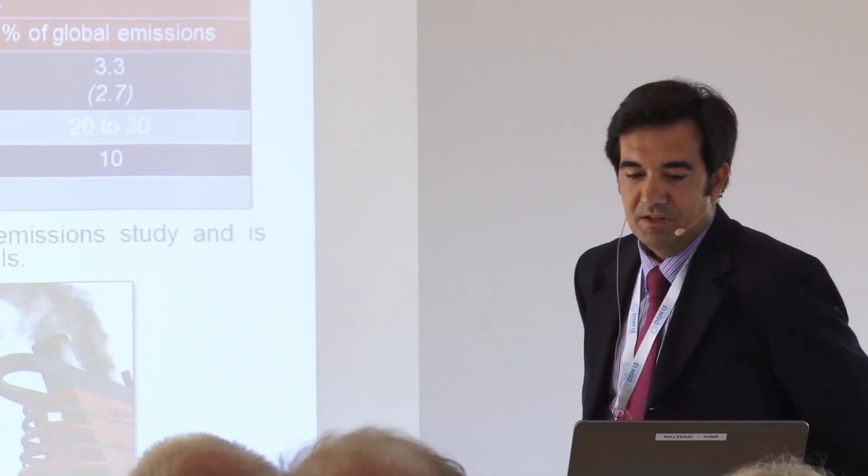So we know that shipping is very traditional, but is the most efficient way of transportation. But even so, transportation by ship is polluting the atmosphere, and we know that there are tons of NOx and SOx and particulates.

IMO has been involved in following this matter of emissions to the air since the beginning, since 1997. And then in 2008, the rules for air pollution came into effect in MARPOL. They are continuously monitoring the situation, and this year they have even decided to make a third report, because this is the result of the second report they made about emissions from shipping in 2007.

This year in the Environmental Committee in March, they decided to make another report, which will be the third, and they are also following very closely the evolution of the sulfur content in the fuels.

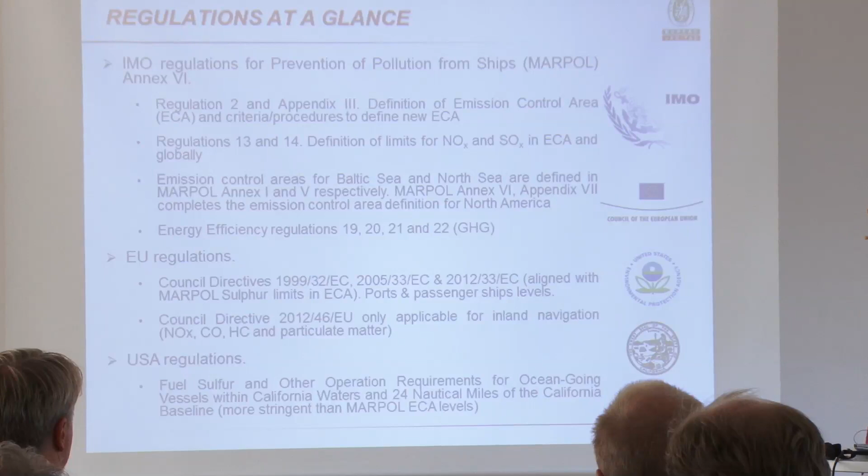The regulations now for air emissions are as follows. You can see in this slide, as you know, the MARPOL regulations are the main regulations for NOx, SOx, sulfur and nitrogen pollution substances to the air. And inside MARPOL Annex 6, there are all regulations related to these pollution products and to the emission control areas. I will also show you another slide with details of all the emission control areas included in MARPOL.

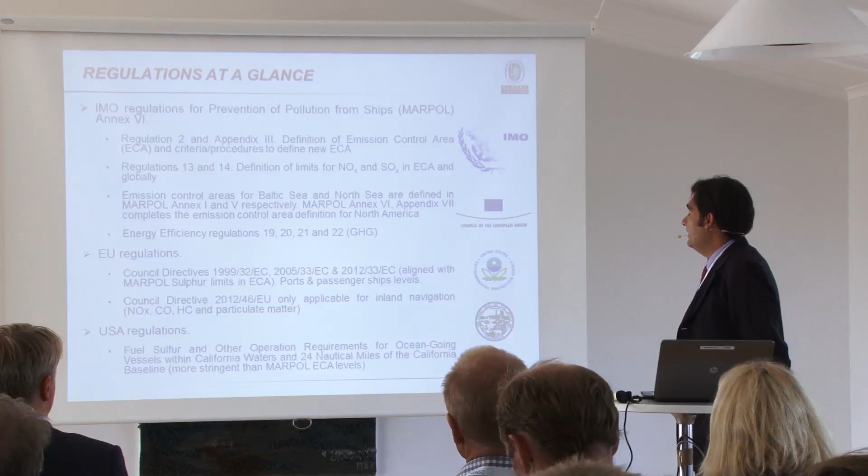And last but not least, there are also regulations in the same Annex 6 related to energy efficiency, in close connection with CO2 and greenhouse gases. On the other side, we have the European Union rules, which are very close to the International Maritime Organization MARPOL rules, in line with the last regulation from last year, but more stringent in some aspects, for ports and passenger ships. I will show you later the levels required for that.

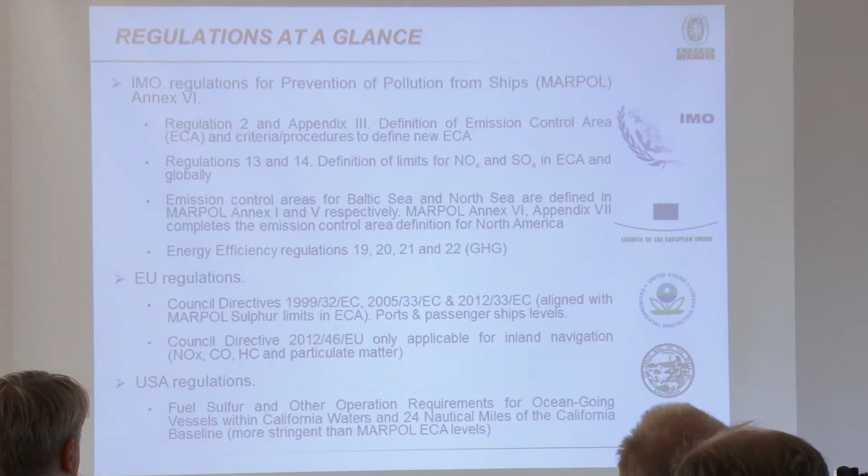There are no regulations for international or coastal shipping as far as NOx, but there are some regulations for inland navigation. And last, USA regulation, specifically in California. We have regulations to comply with within 24 miles of the coastal area of the state of California in the United States.

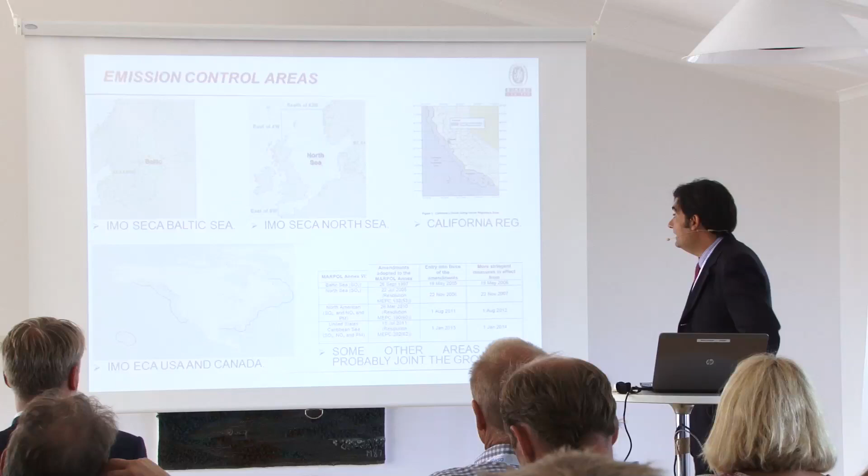These are the areas now defined as emission control areas. For the time being, we have the Baltic, as you know, the Baltic SECA, only for sulfur emissions. We have the North Sea, also SECA, sulfur emissions. We have the IMO emission control area in the United States and Canada, 200 miles from the shore, for NOx, SOx, and particulate matter. So this is NOx and SOx, and those ones are only for sulfur. The California regulations, 24 miles from the coast, are also related only to sulfur.

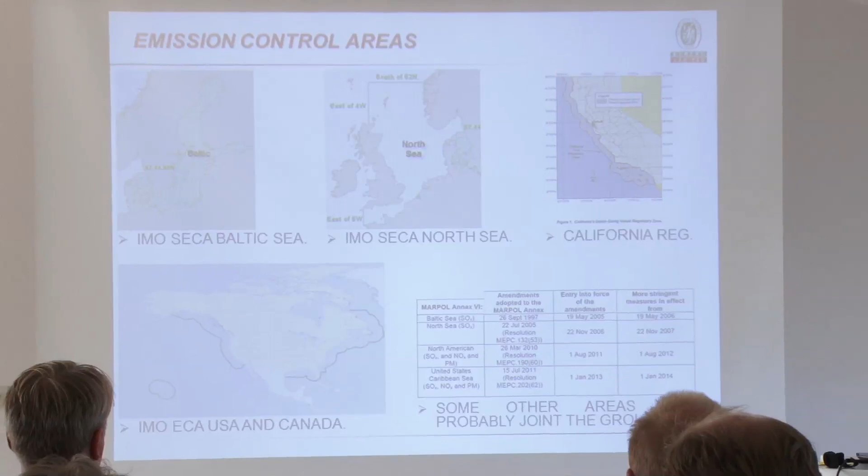In these charts, you can see the different dates of definition of the area and the entry into force of the stringent levels. Three areas have already entered into force. The last one last year in August, North America and Canada, and the next one, on 1st January next year, will be the Caribbean US islands.

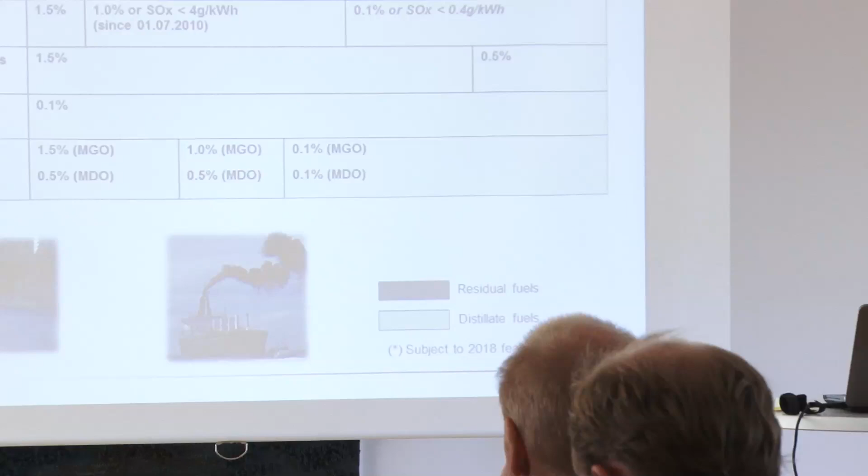So what is now required according to IMO, California and European Community rules is in this chart. We have the dates for compliance with a certain limit of sulfur content in the fuels used in ships. The global IMO limit will become very, very stringent in 2020, 0.5. This is subject to a feasibility study in 2018. So depending on the status of the fuels available for shipping, the IMO will decide whether this figure will be mandatory or not.

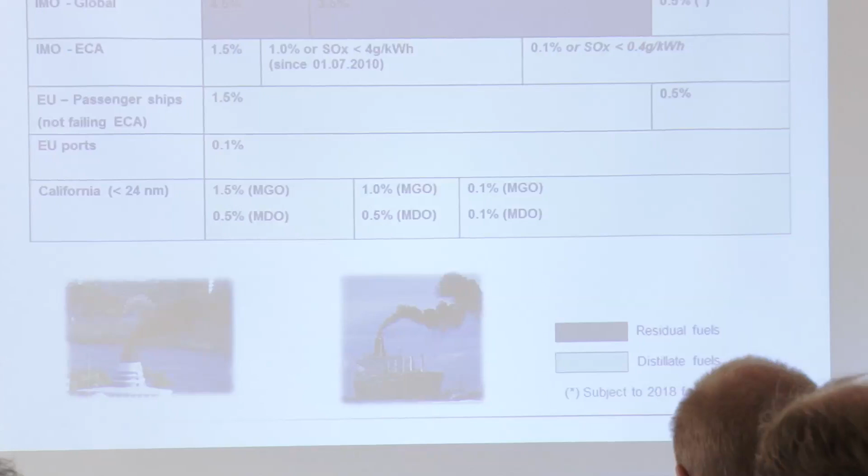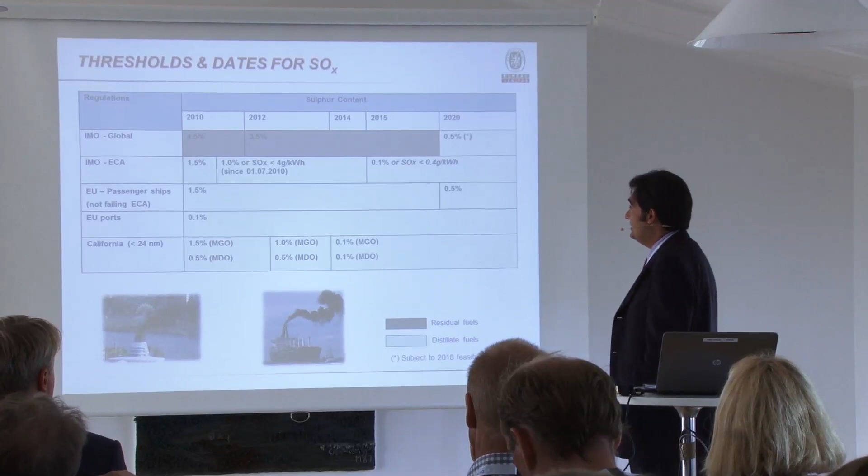The IMO limit in the emission control areas is becoming very, very stringent in 2015, so in less than 1.5 years from now, 0.1. Specifically, European regulations for passenger ships not sailing in emission control areas, but sailing very often between ports in the European Union, is 1.5. In European Union ports, ships have to comply with 0.1, which will be the level in the emission control areas. And in California, these levels are entering into force on 1st January 2014.

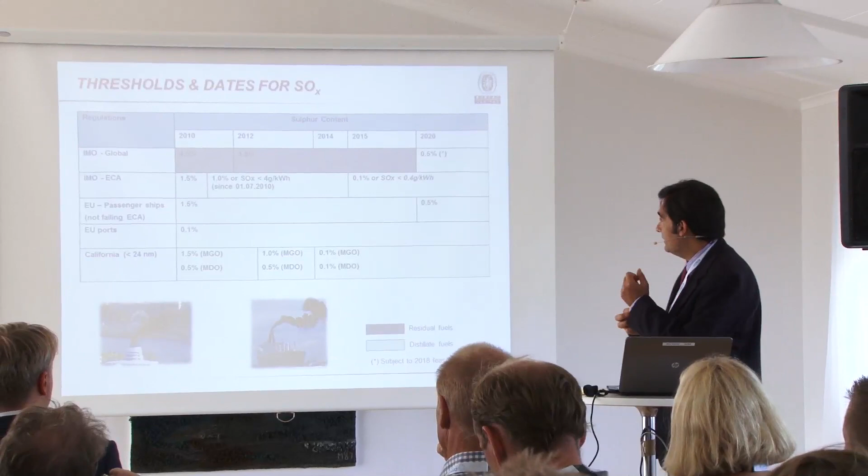So what is the problem here? Well, the problem is very simple. We now have fuels with sulfur contents around 2.4, let's say. This is enough for IMO, but it's not enough for ECA areas, and will not be enough for those areas. We need to find fuels with less sulfur content, so more expensive. We have to use gas oil, diesel oil, distillate, with expensive cost.

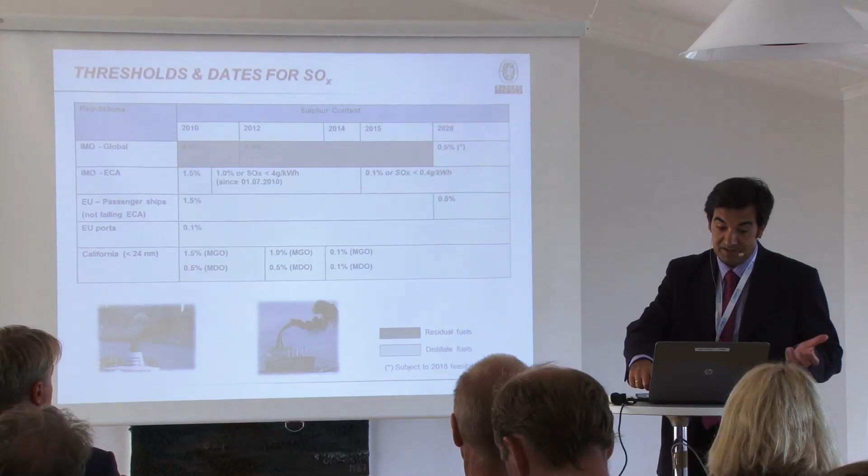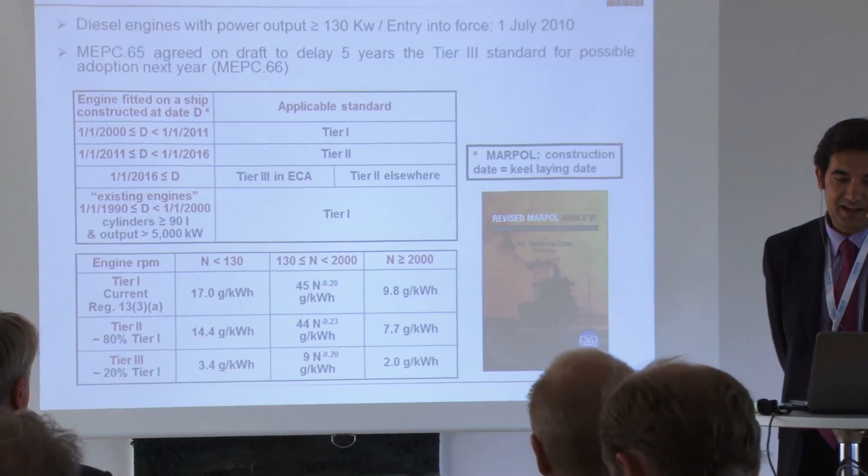MARPOL rules for NOx, you know, there are some different levels of compliance. Now we are in tier 2. Tier 3 level is expected, but subject to the approval of one draft in the next MEPC next year. This level, tier 3, could probably be delayed 5 years. So it means that the tier 3 levels probably will be mandatory, but in 2021, not in 2016. But we will see. This is subject to final adoption agreement in the next environmental committee inside the IMO.

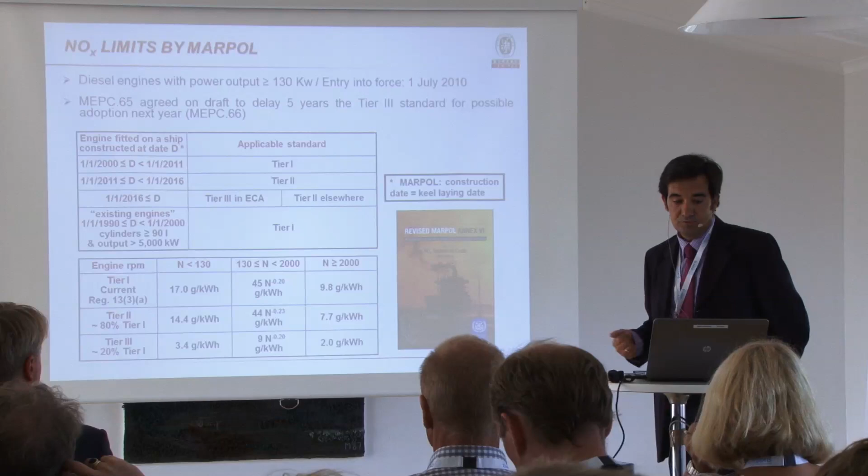But here, the problem with tier 3 is as simple as that: tier 3 requires a reduction of almost around 80% of the NOx levels compared with tier 1. Tier 2 is simple, to achieve this 20% reduction in NOx, but to achieve the 80% reduction is very hard, very difficult for the engine manufacturers.

The last regulations in MARPOL are related to greenhouse gases, to CO2 mainly. In these regulations, regulation 19, 20, 21, on one hand new vessels have to comply with the energy efficiency design index. And on the other hand, all vessels, new and existing ships, have to put in place on board the ship energy efficiency management plan. This is also a good try from IMO to reduce the CO2. And we'll see that with alternative fuels, we can also have reductions in greenhouse gases.

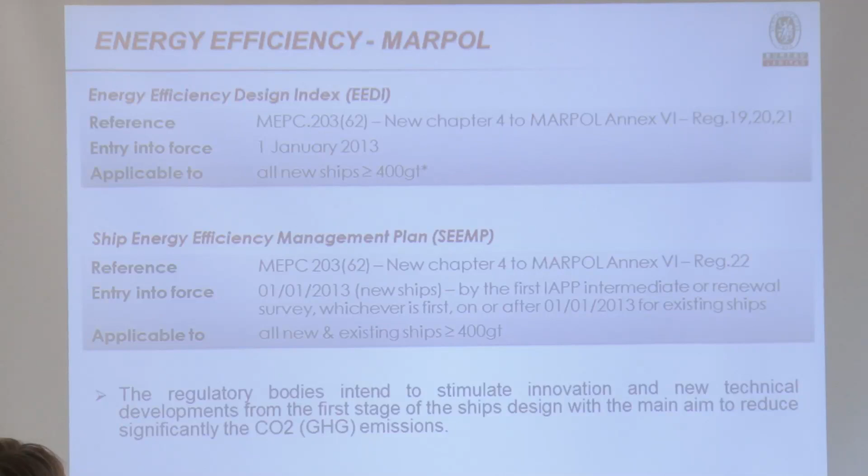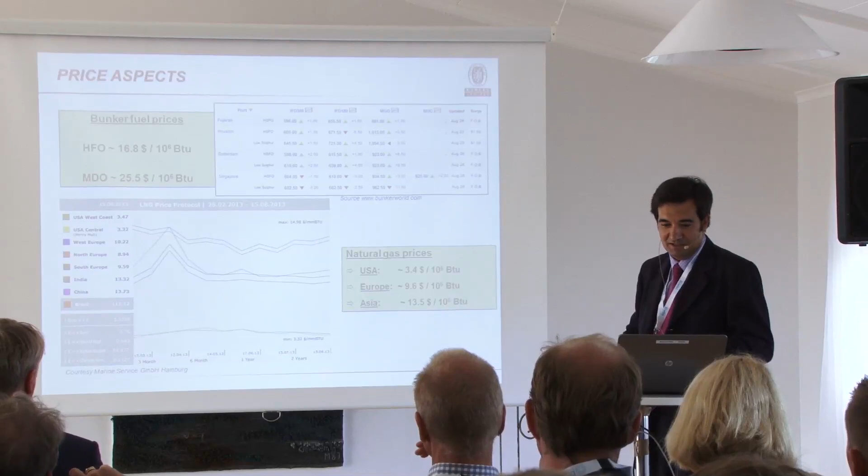We have seen all these technical aspects, but now we are entering the commercial aspect of LNG compared with bunker fuel prices nowadays. I have made the slide all in the same units, dollars per million BTU, British thermal unit, because natural gas prices are not the same, always depending on the energy content of the LNG. The LNG is not the same if you buy it in Norway or in Qatar or in Libya. But at the end of the day, what is really clear is that these are the levels in the spot market of LNG all over the world.

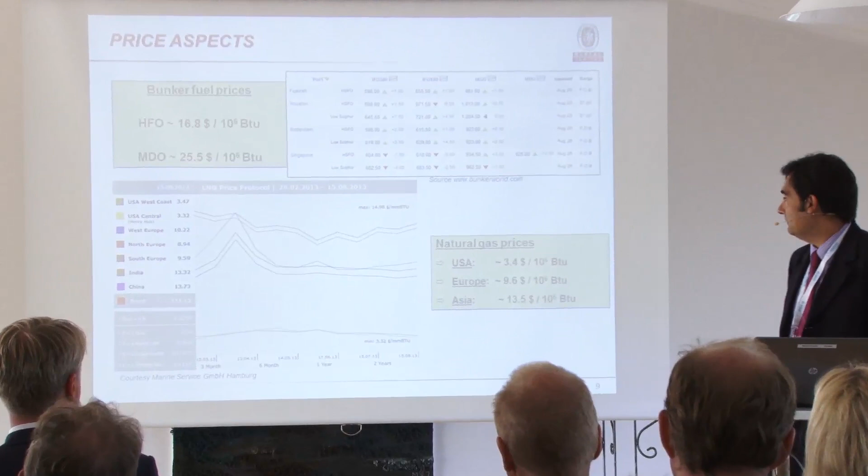In the USA it's very cheap because they are developing shale gas, and these techniques are very cheap for the extraction of the gas. But in Europe the price is also very convenient. In Asia it is a little bit more expensive, but compared with marine diesel oil specifically, it is very cheap.

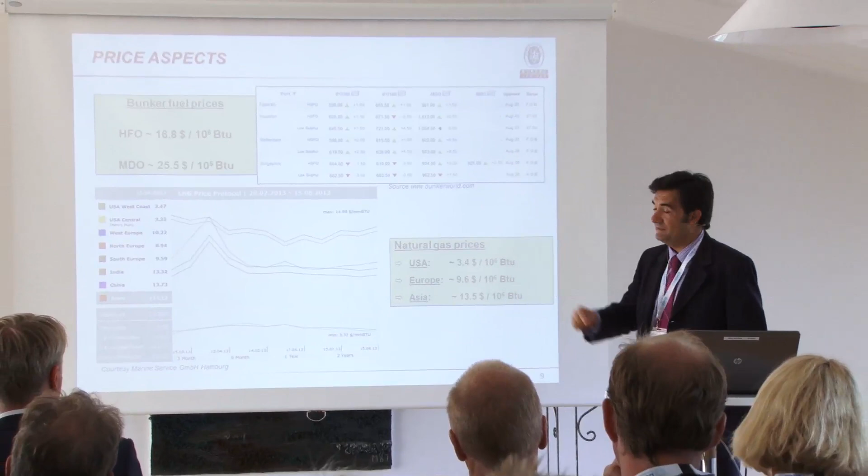On top of the spot price, you have to take into consideration also the bunkering cost and the logistic cost. These are not bunkering prices, while the heavy fuel oil and marine diesel oil prices are bunkering prices. But on top of that, you can put, let's say, $6, $7 more. You never know. But you are always cheaper than marine diesel oil. You will be, in any case, much cheaper than marine diesel oil, even in Asia. So LNG could be one solution. We'll see if there are others.

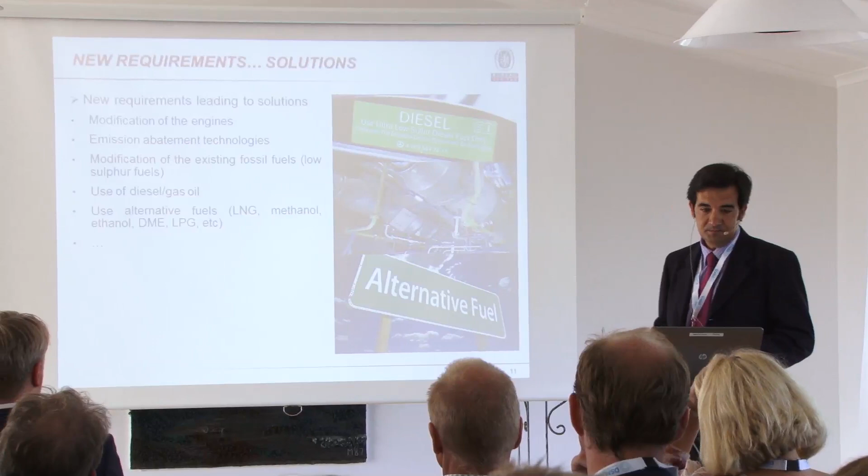How to comply with regulations? You can comply with different techniques, different solutions, different alternatives. You can modify the engines. You can have abatement technologies to reduce the content of NOx or SOx after the combustion in the engine. You can use different fuels, like LNG or methanol or any other low flash point liquids.

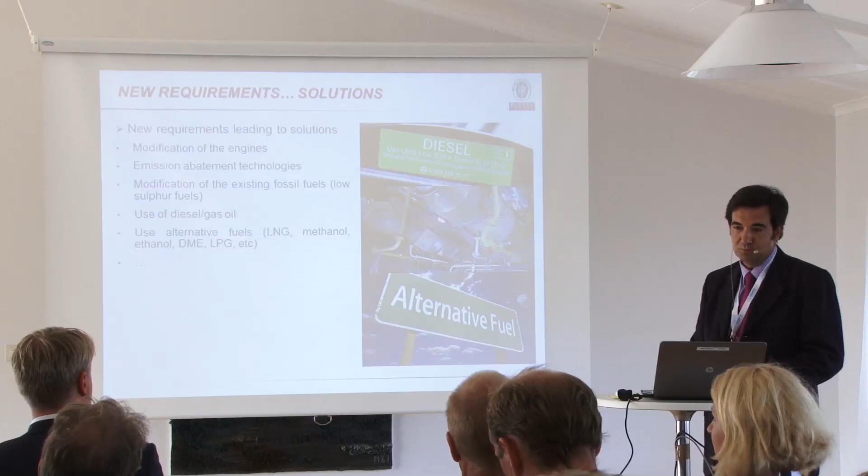But when we are talking about solutions, I think it's always easier to think of a solution upstream than downstream. I mean, if you have to solve a problem, modifying the content of sulfur, SOx, NOx in the gas emissions is more difficult than directly using a fuel with a lower content of sulfur and lower content of NOx. And so we have alternatives, and we'll go through all of them.

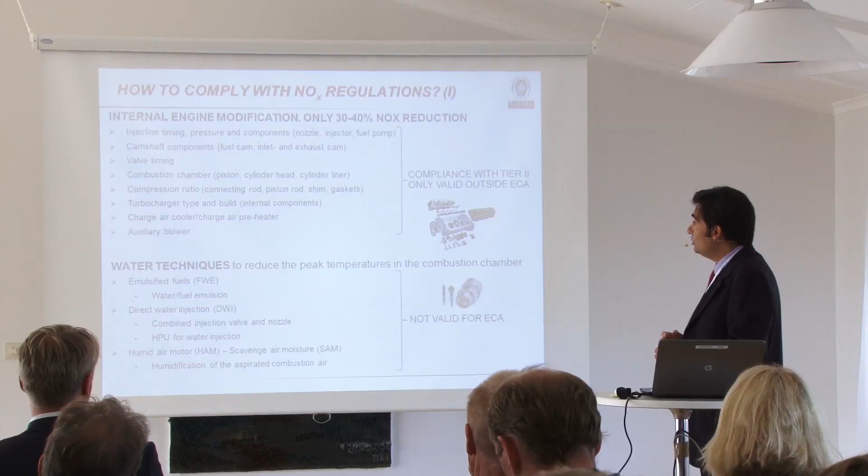For NOx, the best solution in the beginning, when we had tier 2, is just to modify the engines, and we have a lot of solutions. To modify the engines means that the engine manufacturers try to reduce the combustion temperature in the chamber, and with the reduction of the temperature, you reduce the NOx in the emission gas to the atmosphere. But this is not good for tier 3, only for tier 2. And these solutions are also not good for efficiency of the engine and for consumption. Normally the efficiency is worse than the original engine with tier 1.

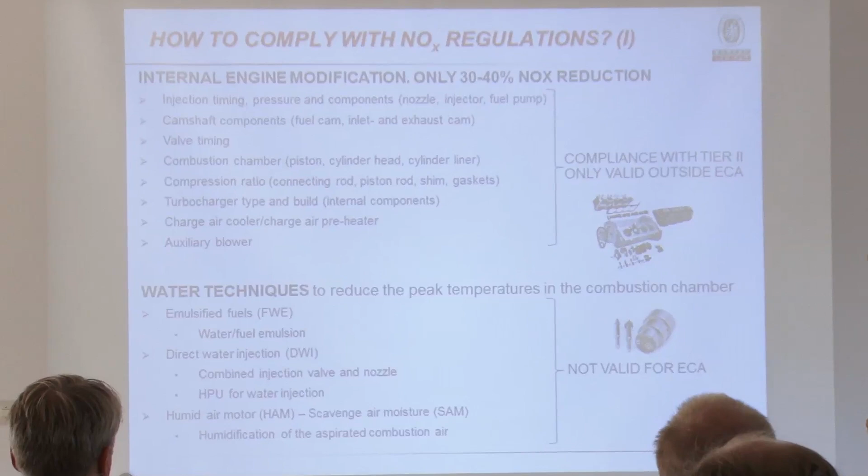We also have water techniques, which means that we can use emulsions of water with fuel, techniques to inject water in the combustion chamber, or humid air motors, or scavenge air moisture for 2-stroke engines. Just techniques to reduce the temperature in the chamber. These techniques are also not in compliance with tier 3, and the same for the efficiency of the engine: the efficiency is reduced.

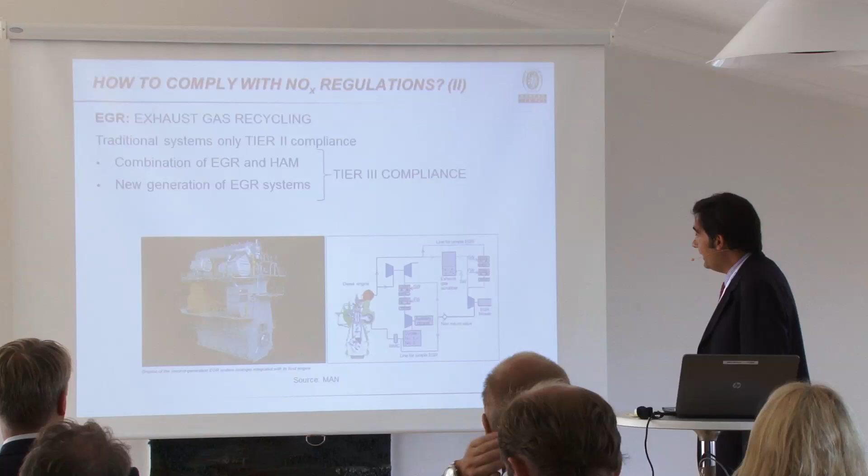Combined techniques with exhaust gas recycling and humid air motors are in compliance with Tier 3, and there are some new generation exhaust gas recycling systems for 2-stroke engines which are in compliance with Tier 3 also.

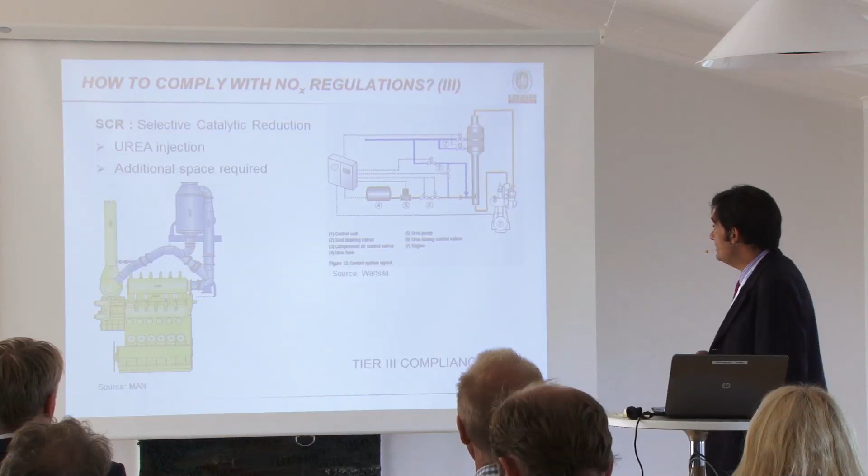But the only technique for the time being which can reduce the NOx levels to Tier 3 is selective catalytic reduction. With urea injection in this equipment, there is a catalytic reaction inside the equipment, so you reduce the content of NOx in the exhaust gas. This is a technique available in the market for practically all the engines, 4-stroke and 2-stroke.

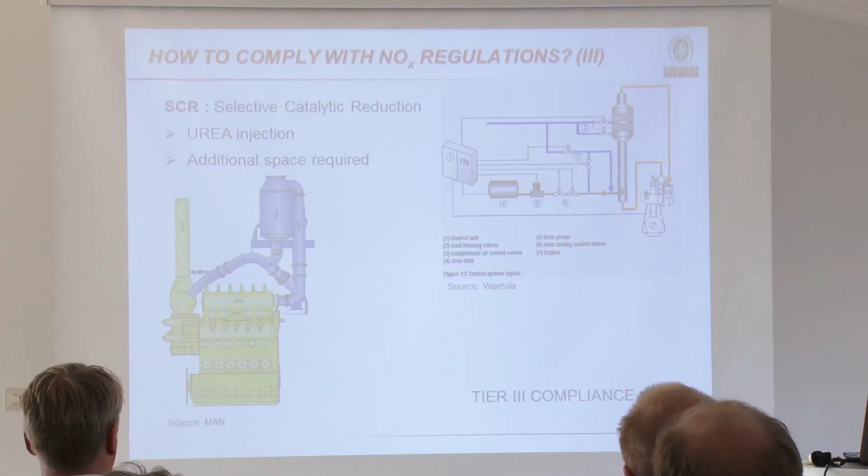But you need these urea tanks, additional space, and another disadvantage is that these systems are normally designed for no more than 60,000 hours, which means 7 or 8 years probably for a new ship. You put the system in, and you have to renew it in 7 years probably, or something like that.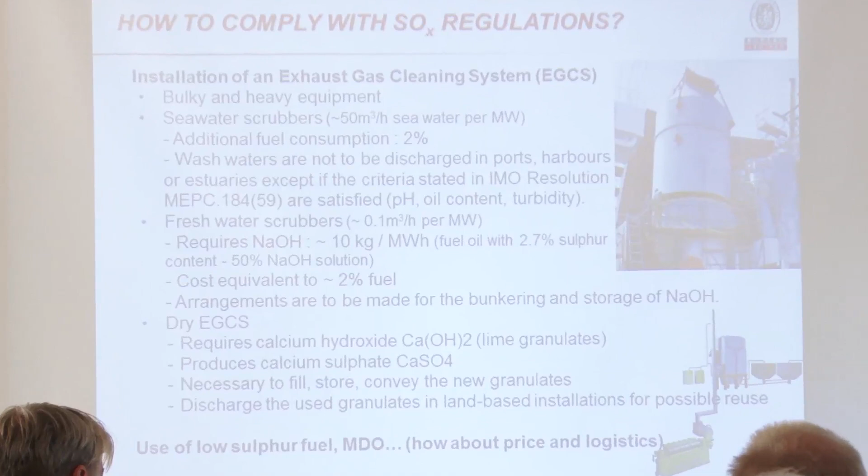For compliance with the sulfur levels, we have the scrubber solutions. These exhaust gas cleaning systems are designed to reduce the sulfur oxide content, and there are different kinds of scrubbers. But we have almost all the time the same problem with the space required for the scrubbers. They are big equipment. Also the weight, and you have to consider you have to put the scrubbers on the top of the funnel where the exhaust pipes are going, and it's very expensive also.

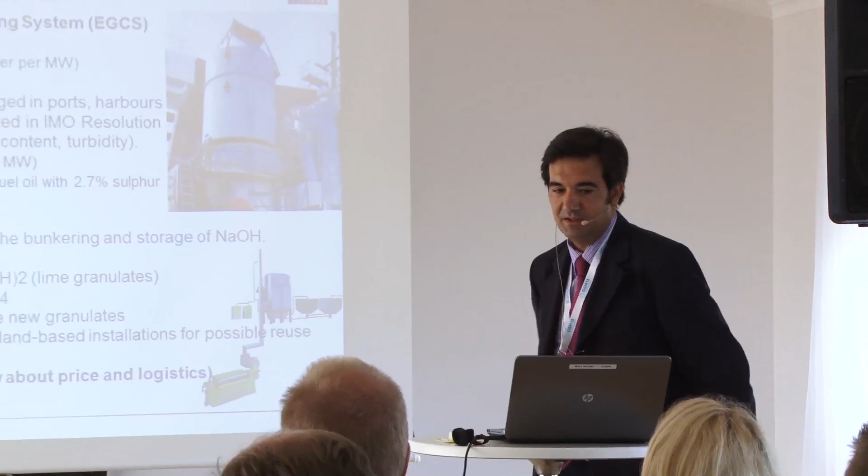But the most important thing about these scrubbers, exhaust gas cleaning systems, is that they have not been fully proven. There are few equipment suppliers, I think more or less 6 all over the world. Most of them are seawater or freshwater scrubbers or hybrid solutions. Freshwater scrubbers, for example, require caustic soda. Caustic soda is not a good solution for handling inside the ship. It's very dangerous also. And dry scrubbers have been used in shore industry, but not in shipping.

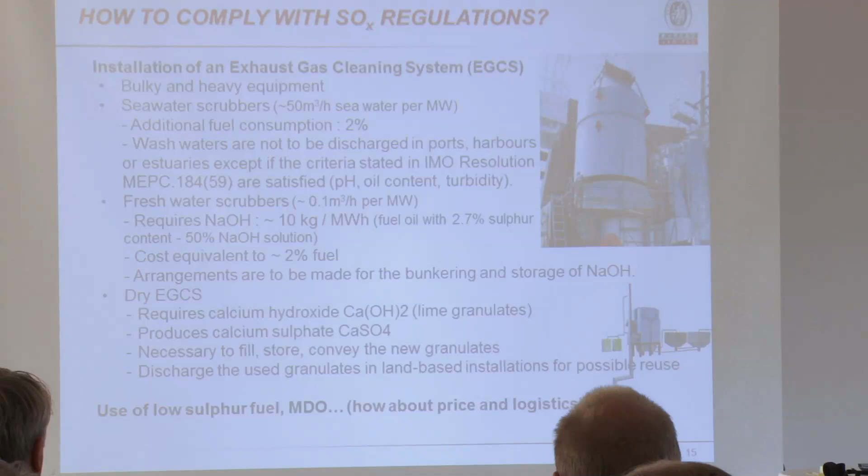There is only one company developing this solution, but this solution also requires a lot of space, as you can see here, a lot of space for storing the calcium hydroxide and the lime granulates, to store the product after the cleaning of the exhaust gas, and there's always a problem with that.

With the seawater scrubbers you also have problems with the wash water. You have to comply with the IMO resolutions regarding the pH content and the oil content, etc. So you cannot put the water that you have used in the scrubber directly into the seawater unless it complies with these levels. So these techniques are really not fully proven for the reduction of SOx. So at the end of the day, we have to find different alternatives: to use gas oil, or to use LNG or another fuel with less sulfur content.

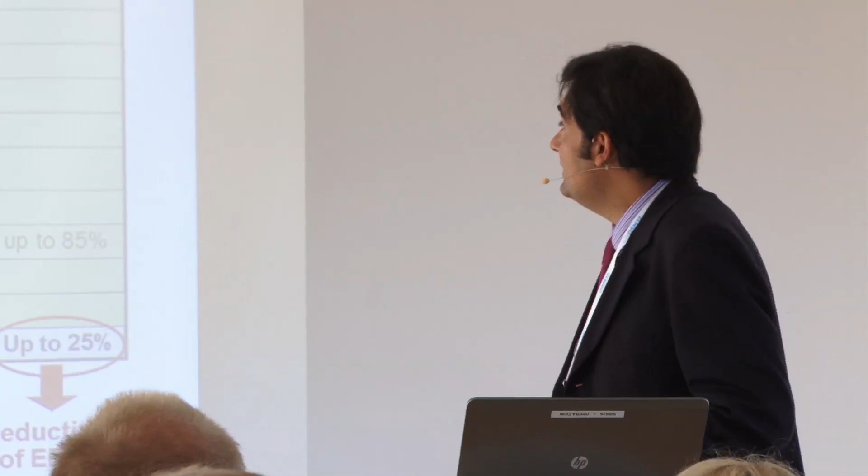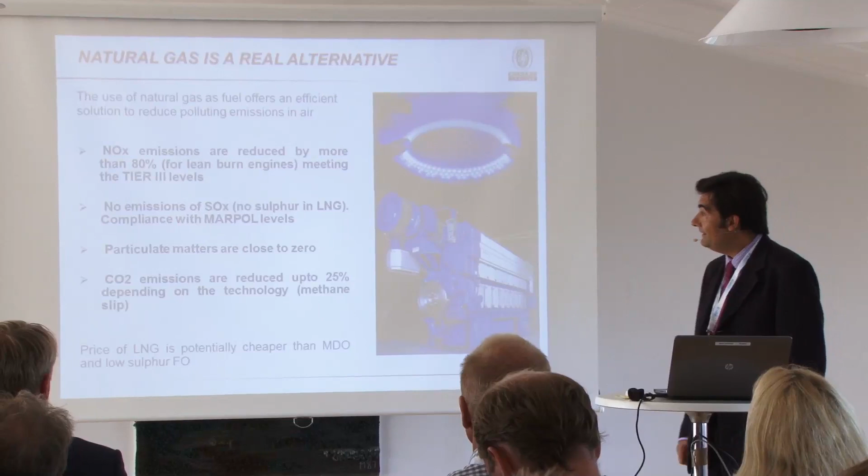In this chart, you have a kind of summary. It's just to repeat the same, but at the end of the day, these levels of NOx, SOx, particulate matter, and CO2 you can reduce very easily with, for example, natural gas as fuel. With the other techniques, we always find some problems or disadvantages. With natural gas, normally with these 4-stroke engines, we have 80% or more of the NOx emissions reduced. With gas-only engines, we have almost 90% reduction.

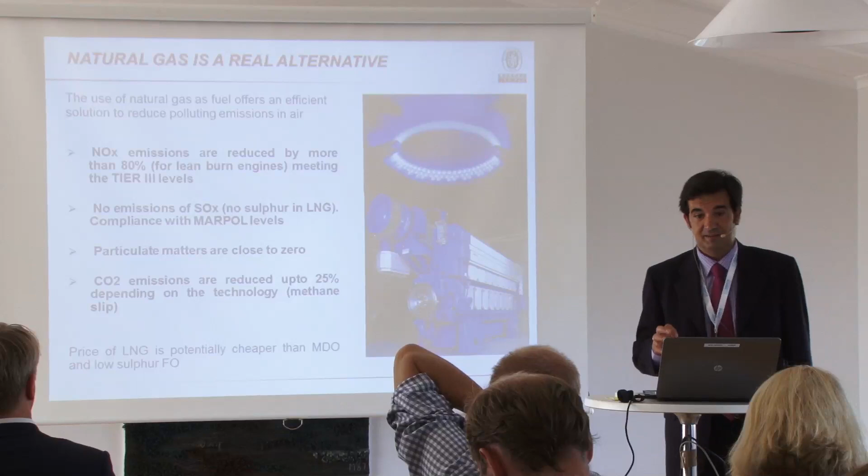The reduction in sulfur is clear because there is normally no sulfur in LNG, and particulate matter, in close connection with the sulfur, is close to zero. With CO2, in principle, we can reduce up to 25%, but this also depends on the methane slip. Methane slip is the methane which is not burned in the combustion chamber. If you have problems in the combustion chamber, or the engine is not well designed, methane goes to the atmosphere, and methane is almost 25 times more dangerous for the atmosphere than CO2. So this is something we have to take into consideration.

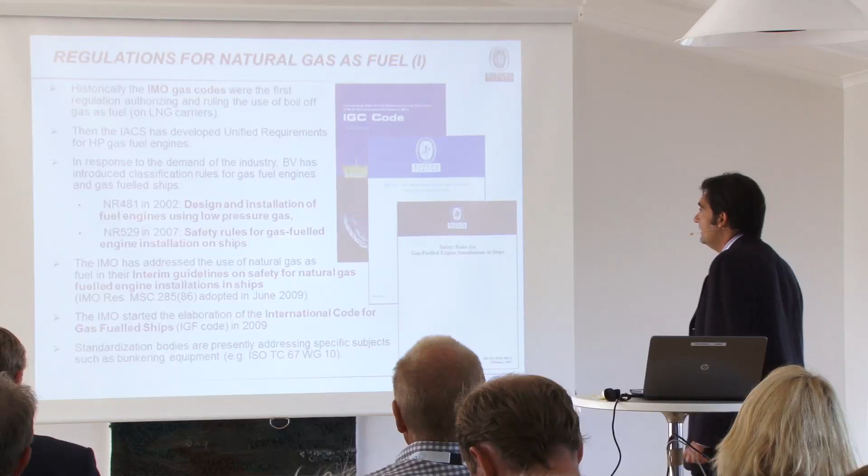And the price, as we have seen already, is competitive compared with diesel oil. So all the industry, IMO and the class societies in general, have developed a lot of regulations specifically for LNG as fuel on board ships. From the beginning, in the gas carriers, we have used the LNG boil-off gas as fuel for the LNG carriers.

In the rules, we have also some examples. We have developed rules specifically for LNG as fuel. In Bureau Veritas, we have particularly 2 regulations which help the shipping industry to design the vessels safely for LNG as fuel. In the IMO, we have these guidelines already in place since 2009, but there is just a guideline, there is no mandatory regulation, so they are now developing the IGF code, which will be mandatory. And now it's a little bit delayed, I will explain.

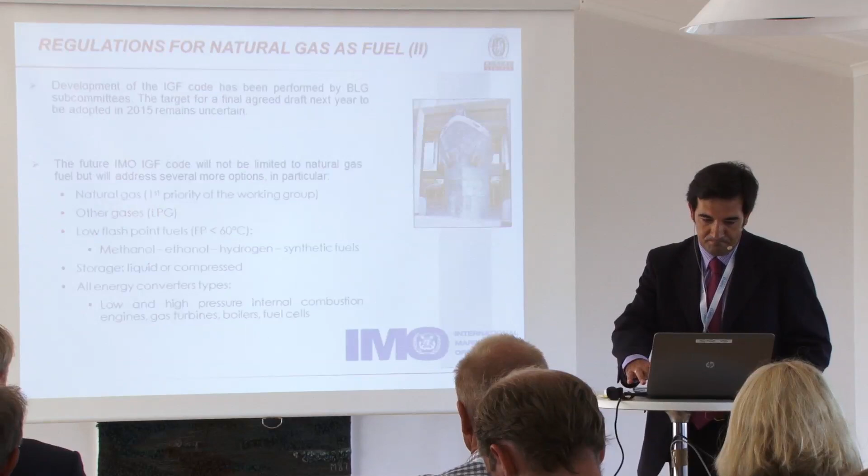The intent of the IGF code is to cover not only natural gas, but other gases and low flash point fuels like methanol, ethanol, etc. But there is a big discussion inside the IMO subcommittee this year to try to develop the IGF as soon as possible, even if the methanol or other alternatives of fuel are not ready.

There is one trend inside this group in the IMO asking to complete the natural gas regulations only, and then to add all regulations for methanol, etc. There is another trend asking to put all regulations, not only LNG, but methanol. And we'll see, but in fact, the problem is that the IGF is a little bit delayed compared with the original schedule.

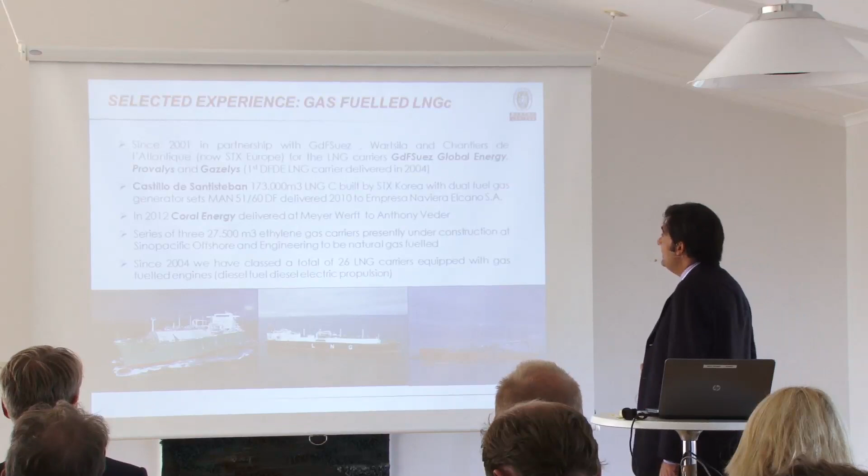Since the beginning in Bureau Veritas, we have developed a lot of projects. I will show you some examples, but in natural gas as fuel for gas carriers, LNG carriers, we have been the first to develop the dual fuel diesel electric LNG carriers. We started a joint project with Wärtsilä and Chantiers de l'Atlantique, Gaz de France, for 3 ships, and finally the shipyard delivered the ship in 2004 with dual fuel diesel electric configuration. And later on, we also classified one vessel, the first with MAN, dual fuel, built in Korea.

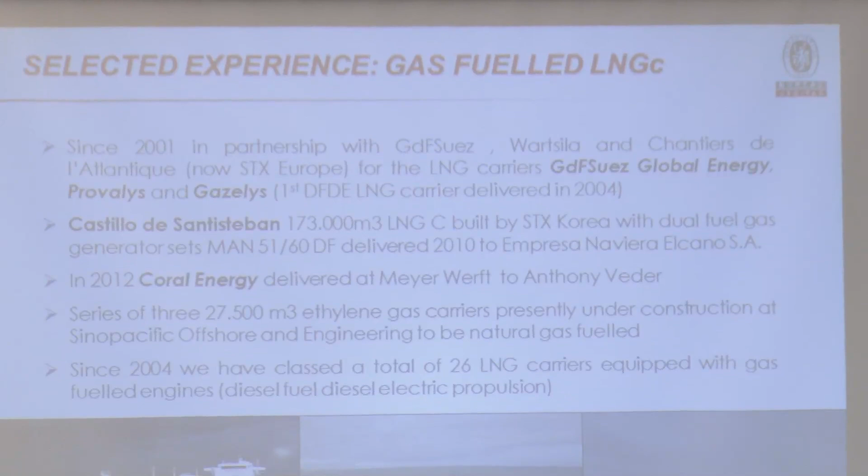There are some more examples. I will pass a little bit faster. There are some examples also in the LPG vessels, using the ethylene sometimes, or the LNG for the consumption in the generators or in the main engines, already developed. And we have approved all the type of engines available in the market, 4 strokes with dual fuel, Wärtsilä, MAN, Rolls-Royce, only gas, and ABC now is almost complete, the type approval.

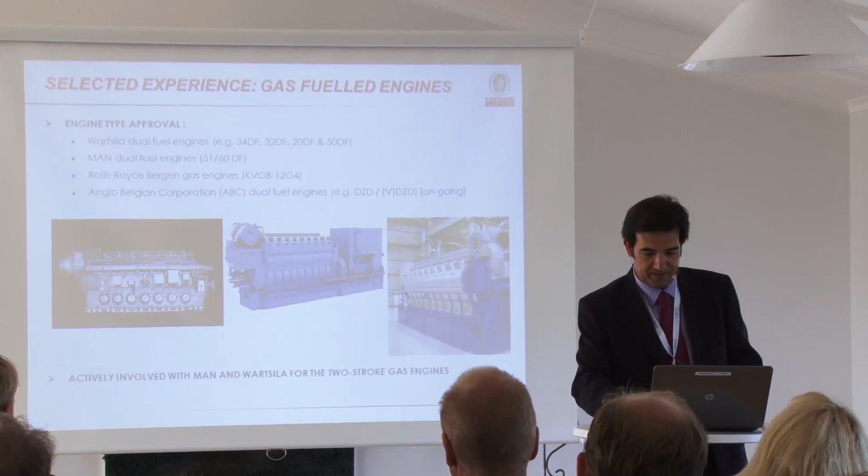Also for 2-stroke engines, we are in close cooperation with MAN and Wärtsilä. MAN has almost finished the approval of the 2-stroke engines, high pressure, but Wärtsilä is going to develop also the 2-stroke low pressure engine next year probably. There are some examples of gas fuel projects, and all shipyards, specifically in the Far East and here in Europe also, are developing projects like ultra-large container ships, 14,000 TEU capacity, with 2-stroke engines, for example. There are some examples also with 4 strokes.

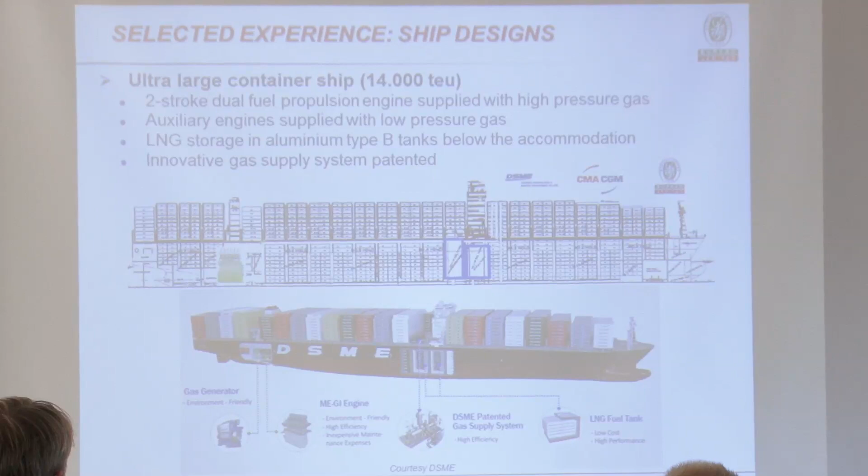We are having type approvals or approval in principle for projects like this in cooperation with CMA CGM and Daewoo in Korea. We have some examples here in Europe also for coastal navigation feeder ships using LNG tanks, portable LNG tanks, container tanks, and inland navigation tankers with different kind of solutions, Type C tanks, and emergency shutdown protected engine rooms, separate engine rooms. All kind of solutions are available, and we are approving projects like this. This project is going to be materialized very soon.

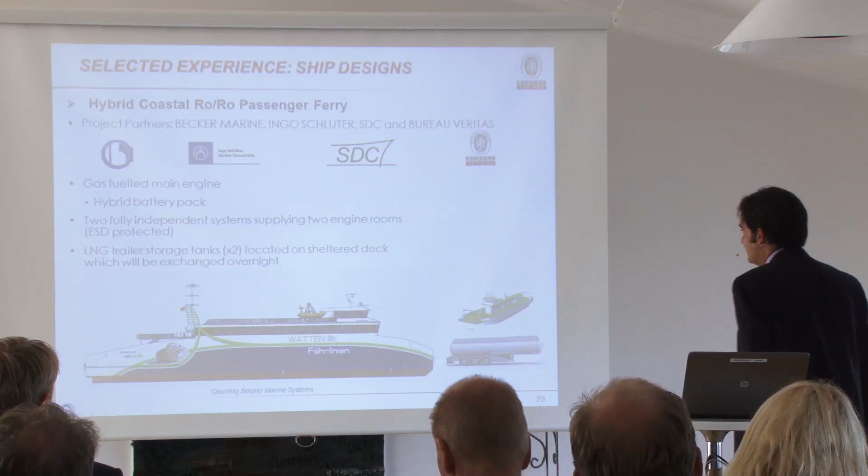It's a project in Germany for coastal navigation. And the LNG gas will be stored in these trailers on board of the ship, of the ferry. And they have a hybrid system on board of the ship. So with the gas, they produce electricity and they store the electricity in batteries.

We have also this experience with bunkering ships. We have developed approvals and we have checked drawings and specifications and designs for bunkering ships. These ships will have specific technical features. Specifically for these ships, you have to take in consideration the boil off in the tanks and the maneuvering of the ship and all bunkering facilities to be implemented in a safe way in order to avoid any problem with the transfer of the LNG for other ships.

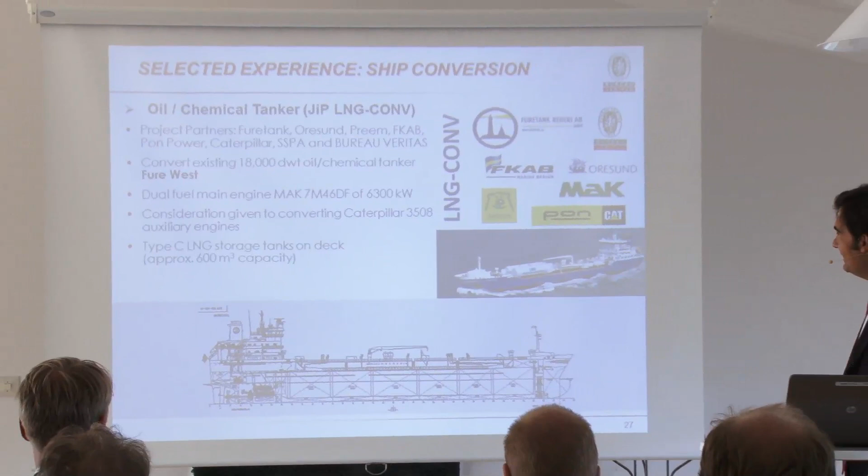There are a lot of projects now. There is only one materialized in the world, but we are approving these drawings, these specific projects, and some of them will materialize very soon. This is an interesting project because this company is also a Swedish company. This company is developing with Bureau Veritas and in collaboration with some other companies, main engine suppliers, etc.

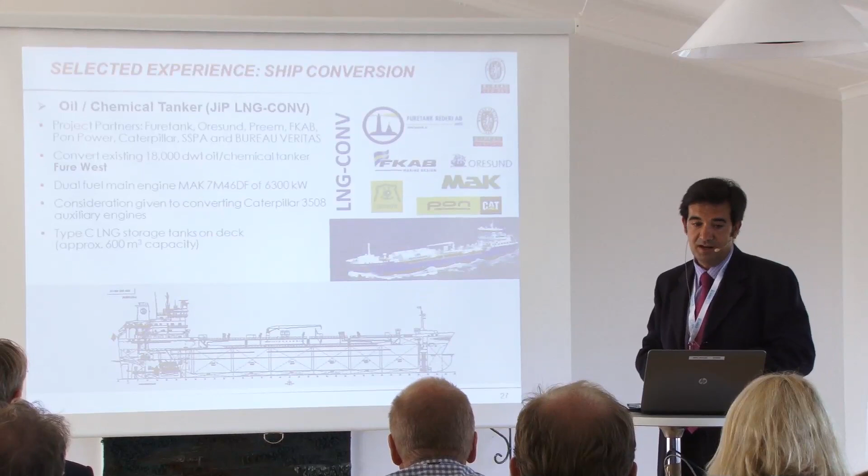This conversion. This is a chemical tanker and will be gas fuel, dual fuel, because it's expected to convert the main engine, the MaK engine, and probably also the Caterpillar auxiliary engines to burn LNG as fuel, with 2 tanks on board of the ship on the forward part. This is the solution that practically all the ship owners with these specific conversions are having in mind, the Type C tanks on the deck.

This is a project inside the Zero Vision tool here in Sweden and also developing inside the European Union funds arrangement.

Another example for gas as fuel. This is a barge which is expected to be in operation in Hamburg. The intention of the barge is to use the LNG as fuel to generate electricity and to give the electricity to passenger ships on the port. It's a good solution because the ship owner is just buying the electricity, but they are switching off all the equipment on board, all the engines and generators on board.

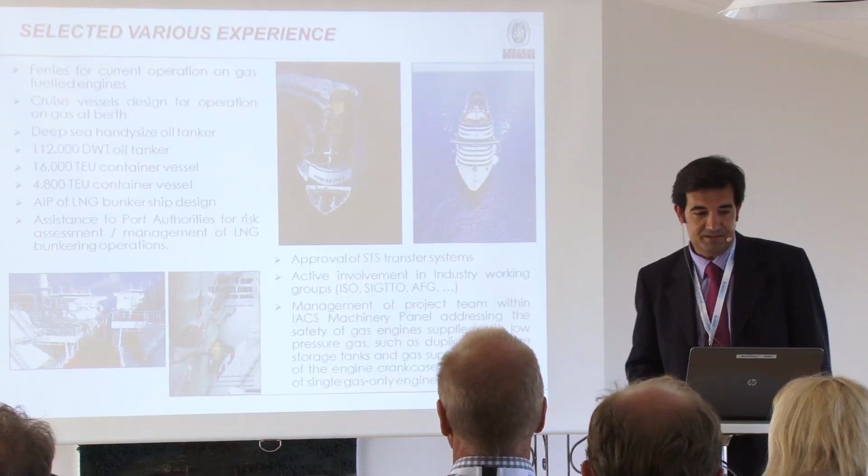We have a lot of more examples of vessels already approved and designs for Aframax tankers, for container ships of any kind, with any kind of containment system. But that's not the end. What about methanol?

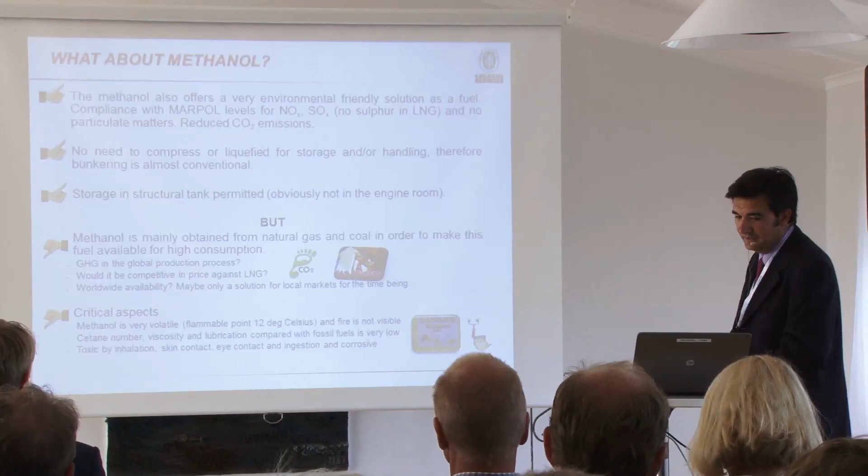So methanol can be used also, as you know, and there is one company developing a project with methanol here in Sweden. What is the main difference with LNG? It's as simple as that: methanol is liquid, it's a chemical, and the LNG is liquid, but it's a gas. So one has to follow the IGF, the regulation for gas as fuel. Methanol is also following the IGF when the IGF will be ready, but it's a chemical, so you have to comply also with the chemical regulations.

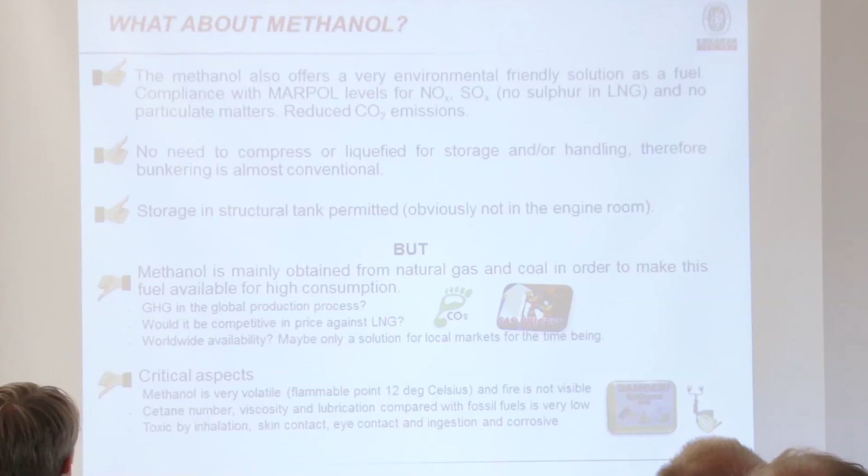The advantage of the methanol is that it's liquid, and for the storage on board, handling liquids is easy or more common than cryogenic gas. But on the other hand, it's very flammable, even more flammable than the LNG. And it's toxic, and there are some aspects in the viscosity, lubrication, which compared with LNG and other fuels is not a good solution, let's say.

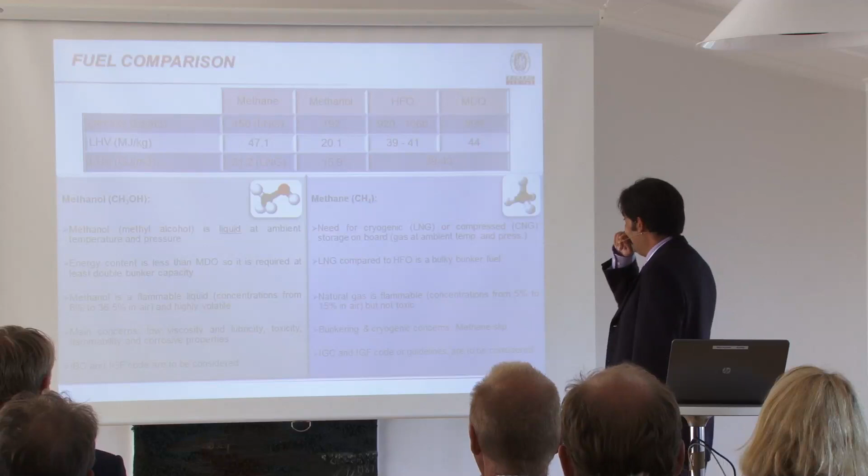You see the methanol compared with the methane, with the LNG, also related to calorific content. You can check the calorific content by volume, by cubic meter, is also a little bit less than the methane. So it means that you have to put a bigger amount of methanol for the same production of energy on board of the ship. With the LNG you need double the diesel oil, for example, because you have 21 in front of 40. But with methanol you need even more than double.

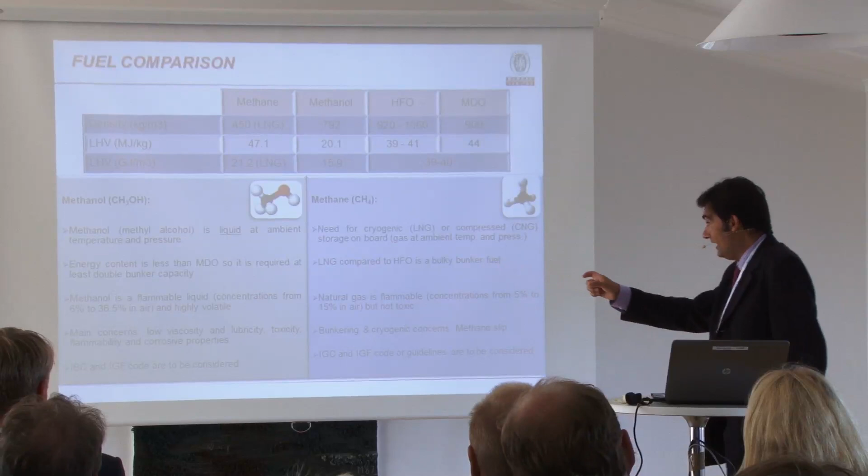This is the flammability range of the methanol, from 6% to 36%, compared with natural gas only from 5 to 15. This means that if you are at a concentration less than 5 or more than 15, the natural gas is not flammable. And with the methanol, if you are inside the 6 to 36% content in the air, then you have a flammable concentration, and this is difficult. IBC and IGF code must be considered for the methanol, and IGC and IGF for the gas as fuel, for the natural gas.

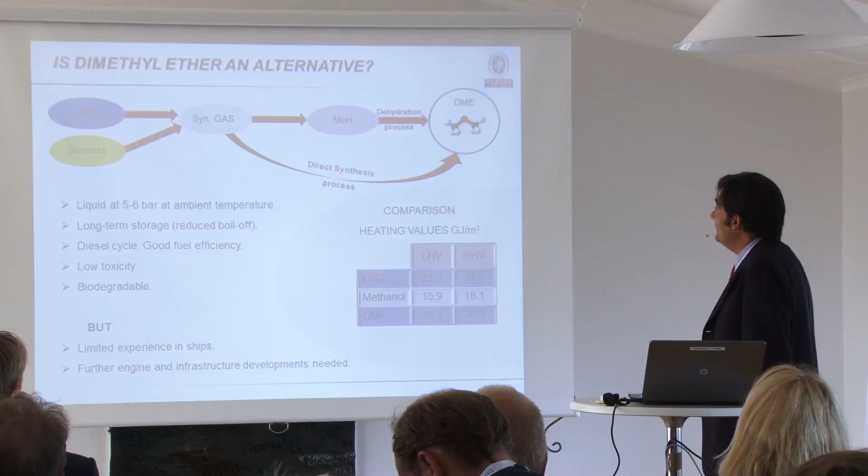With methanol, we have also good alternatives. Dimethyl ether, taken directly from methanol by the dehydration process or by direct synthesis from the synthetic gas. With the dimethyl ether, we have the advantage that it's a gas, but with very low pressure to become liquid, only 5 to 6 bar. So it's similar to LPG, liquefied petroleum gas. We can have the diesel cycle, so good fuel efficiency. The toxicity is very low. But on the other hand, we have very limited experience in ships. Now there are some projects, but it's really limited.

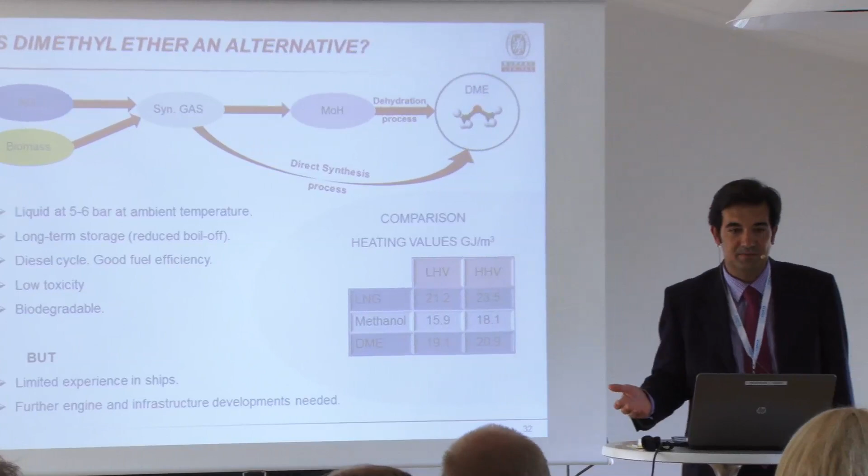This is the lower and higher heating value of the dimethyl ether, so it's bigger also than the methanol, so there is another advantage in having an additional quantity of energy content to be used. With methanol and dimethyl ether, I have seen some examples in the past. This was a very limited pilot project with a fuel cell, not an engine to develop propulsion, just for electricity production, 20 kilowatts.

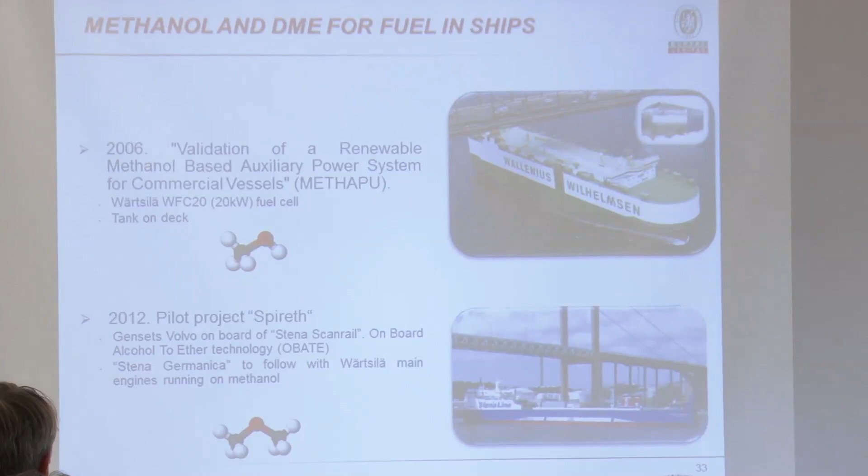But now, as you probably know, Stena is developing these projects, starting with one vessel with this system of on-board alcohol to ether technology, and in the future probably with the other vessel with main engines, with Wärtsilä, with an equivalent or similar technology.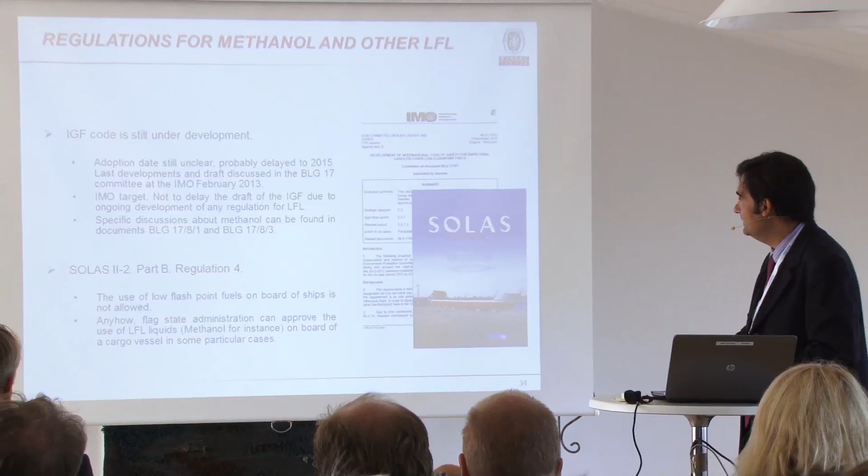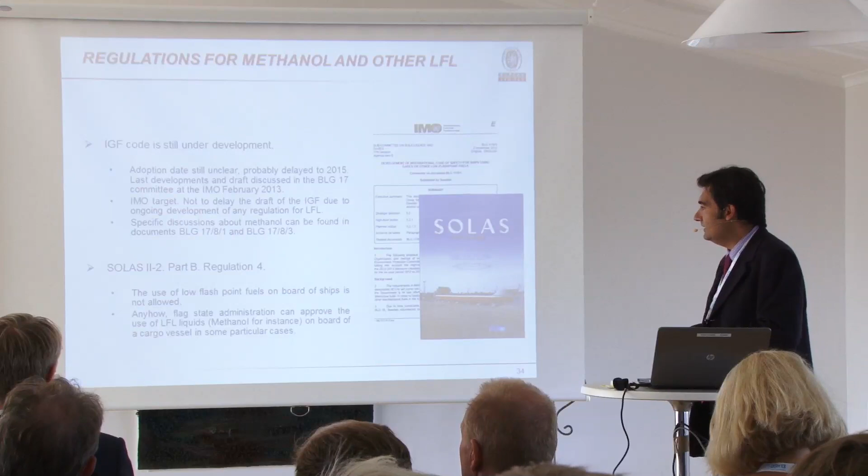What are the weak points for methanol now? As you know, it is the IGF, which is not finalized. It's almost finalized in the part of LNG, but not in the methanol, so all projects with methanol as fuel must have in mind the local administration for the approval, and the considerations in SOLAS, because in principle in SOLAS the use of low flash point fuel is not permitted. But in some specific cases for cargo vessels, if the local administration approves the arrangement with methanol or any other low flash point fuel, for national trading, you can have these solutions.

Different alternatives with methanol and dimethyl ether are very similar to the development of LNG as fuel, because you can have the Otto cycle, which is the dual fuel concept, and you can also have the diesel cycle. But the diesel cycle is more efficient and is a good solution with dimethyl ether, with the OBATE technology, for example, with this new technology.

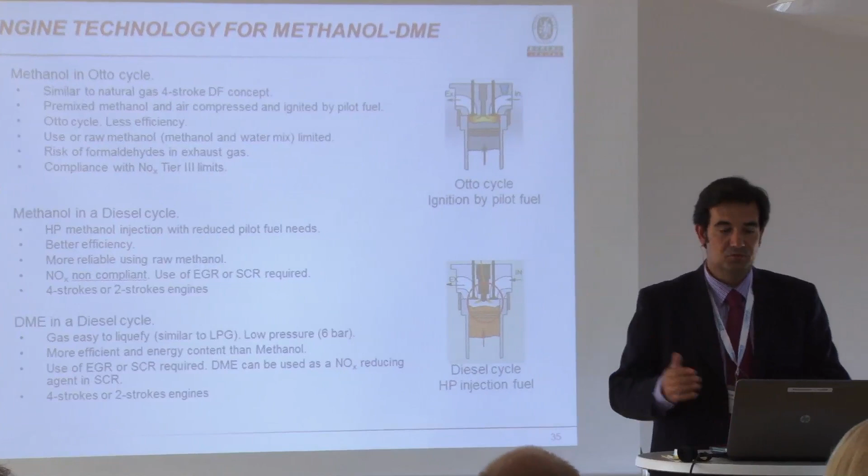The efficiency is very good with this solution, dimethyl ether in the diesel cycle, and also because with this solution you can comply with NOx by using the dimethyl ether in substitution of the urea. This is something very interesting because the fuel can also be used in a catalytic reaction on board the ship to reduce the NOx and then to comply in a diesel cycle with NOx, not only with SOx but NOx.

This OBATE technology is now implemented and is being tested, or is going to be tested, in the Stena vessel, for example. This is not exactly this solution because this is a diagram taken from a MAN document, but it's just to explain that the system is easy because you are storing the methanol in liquid form, because it's liquid, it's a chemical, ethanol or methanol.

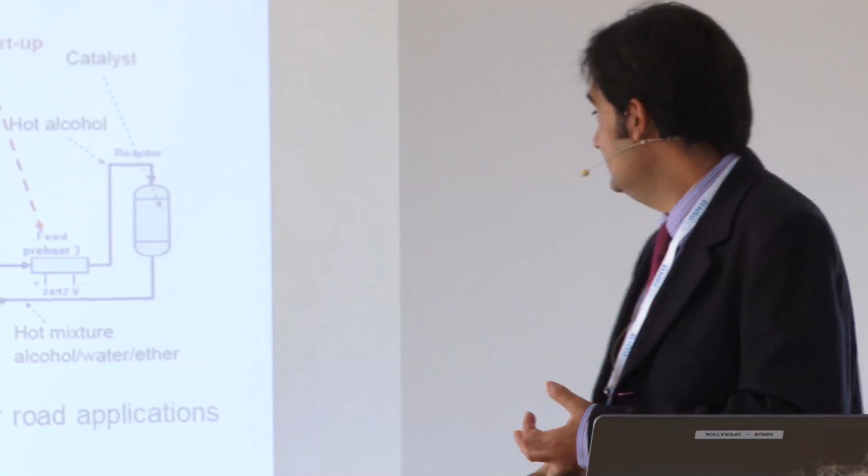And then, by a catalytic reaction, you have a mix between alcohol, water, and ether. So this mix is stored in a tank, OBATE, on-board alcohol to ether. And this is really the fuel that you are going to use on board the ship to produce the power for propulsion or for electricity.

What is the advantage of this OBATE technology? Well, I think there are two advantages. One, that you store the fuel in liquid form, it is not cryogenic. And secondly, as you have a mix with water also, you reduce the combustion temperature in the chamber with this mixture of water with alcohol and ether. You can also comply with the NOx levels.

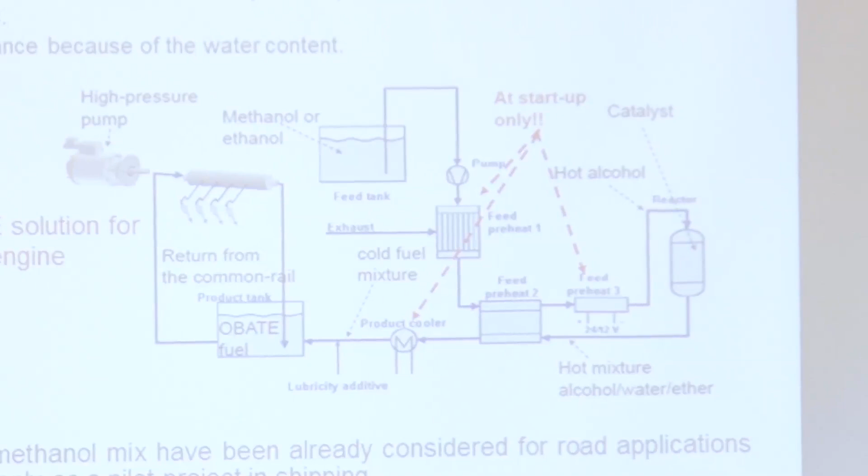So, what is the future? Well, we have seen that LNG is all over the world. All ports are developing LNG terminals, small-scale terminals, bunkering ships. The logistics will probably be in place for the future.

For this deadline, we have the 1st of January 2015. This is worldwide, because we have seen in Europe, Rotterdam, Gothenburg, Hamburg, Antwerp, many ports all over Europe, and also in the United States, Singapore. They have also decided to go to LNG as fuel. With methanol, we have a solution, but this solution is a little bit delayed compared with LNG for the time being. But it's not bad. Technically, it can work.

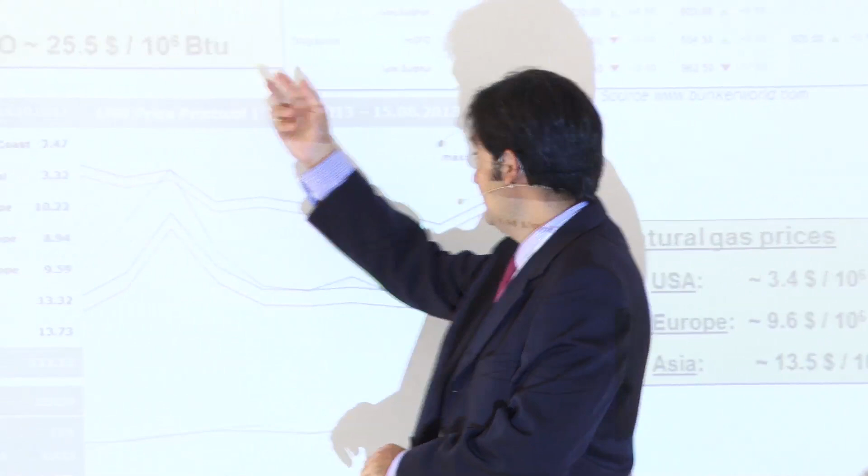Celia, back to the price issue. You compared heavy fuel with the price of LNG. How is... This is the real bunkering prices taken from the internet, in fact Bunker World, two weeks ago, something like that. But these are just spot prices. These prices are not really LNG bunkering prices. Why? Because you cannot find them. There is no index. For the time being, you have to deal directly with the gas companies to ask for that.

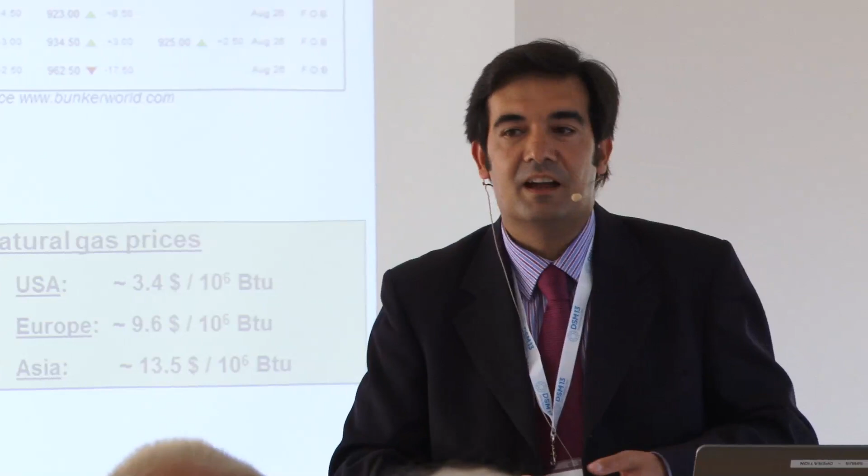And some passenger ship companies, for example, have already dealt with gas companies and agreed on one price for that. And then these companies really know in Europe if the price will be 16, 14, 17, and then you compare with that. But the natural gas prices that you have in the chart to the right, is that in liquefied form, LNG, or is it natural gas? Natural gas. So there is additional liquefaction and transportation, 10% energy loss. Yes, but no.

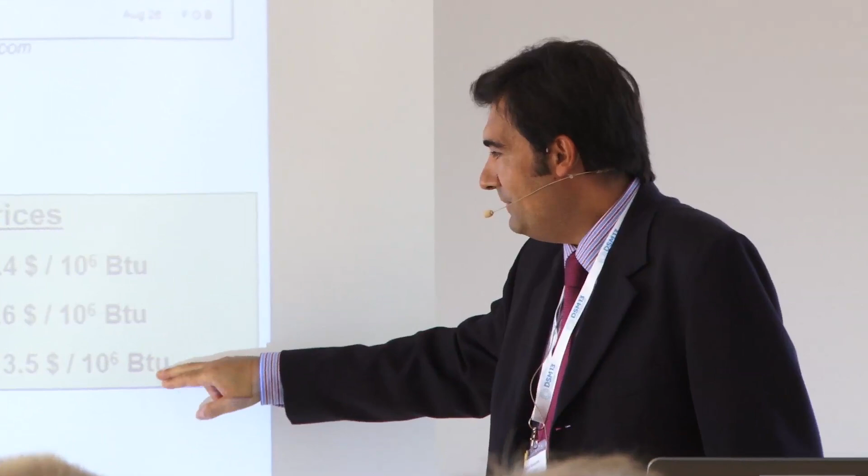When you are buying LNG in Asia, for example, you have prices around $15. So the difference is not too much. Makes sense, I didn't know whether it was included or not. In some way it's included here. But did you find prices for importing to Japan, for example? Nowadays, you find prices around this. A little bit more probably, no more than 15.

But if you see the importing price of LNG in Europe, and you put in all the logistics, etc., at the end the price will probably be more than the fuel, for example. Yeah, that's right, probably, but less than the marine diesel oil. Less up to the point of 16, 20. 20 is becoming very interesting, even if the price finally is $20 per BTU.

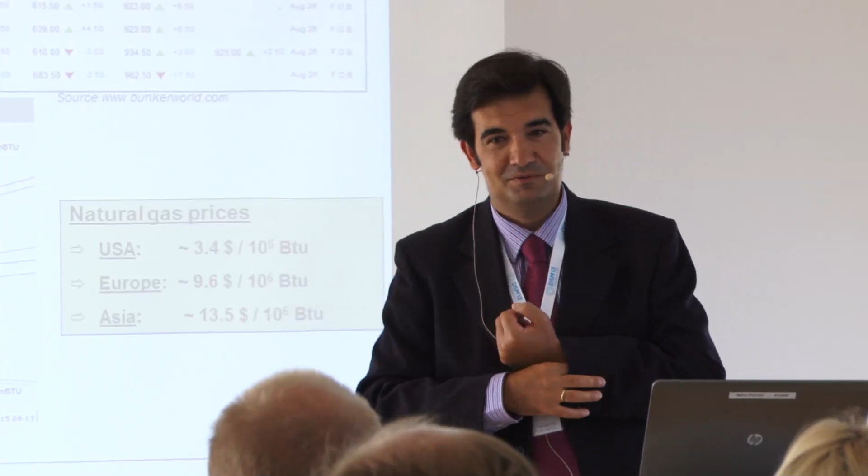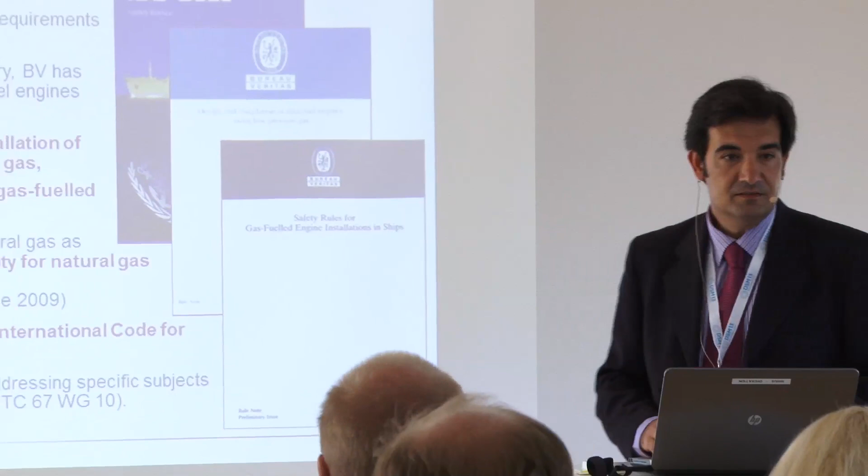But I think some ports are developing rules in cooperation also with other entities. So we will have the standards for bunkering. For example, in the ISO, this ISO working group has already finished one document, one standardization document for bunkering. But this is not the end of the regulation. This is just a standardization document, ISO document. But then, from the safety point of view, these ports have to approve the bunkering operation.

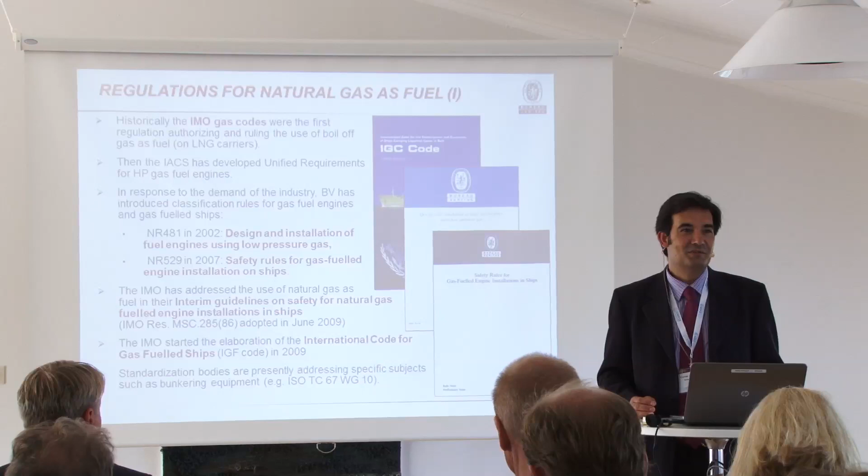But I don't think there will be a conflict. Will there be a conflict? It depends. If each port has different regulations, it will be difficult to comply. Yeah, I got your point. I understand your point.

Maybe I can put something more on this one, because it's not a standardization paper, it's a technical report. And it's publicly accessible today. It is recommending that everyone that does or thinks about doing a bunkering procedure with LNG has to do a risk assessment on the place where you are.

There are some rules coming up that say you're going to have that this year, and so on. And then they go down and tell you that every time you do the operation in a new place, you have to do a risk assessment, because you have to look out for everything else around you. And that's the problem when we assess; they're not really satisfied with risk assessments.

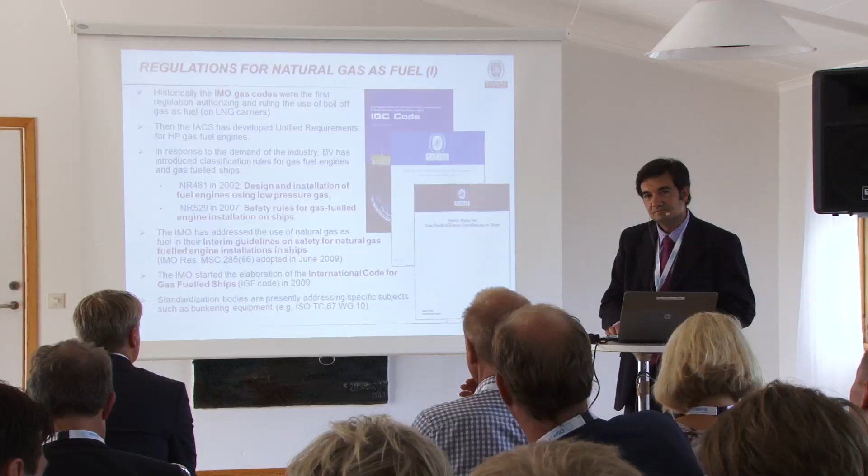In your view, how many vessels will we have globally burning LNG when we come to 2015, 2016? Now I think there are around 40 already delivered since the beginning, in 2001, 2002. Now we have 40, but it depends. I think LNG as fuel is probably the best solution now for a new build, for a vessel which is almost all the time in a SECA area. If you have to convert the vessel or put a scrubber, and the vessel is at the end of its life, then you probably decide just to switch to gas oil.

So at the end, I think it's difficult to predict. Some people say there will be 600 in the next 10 years. Some others say 1,000. I don't see 1,000, but I see probably a figure in between. If we have now 40 and probably another 40 under construction, following this trend, you can have 400, 500 in the next 10 years. It's difficult.

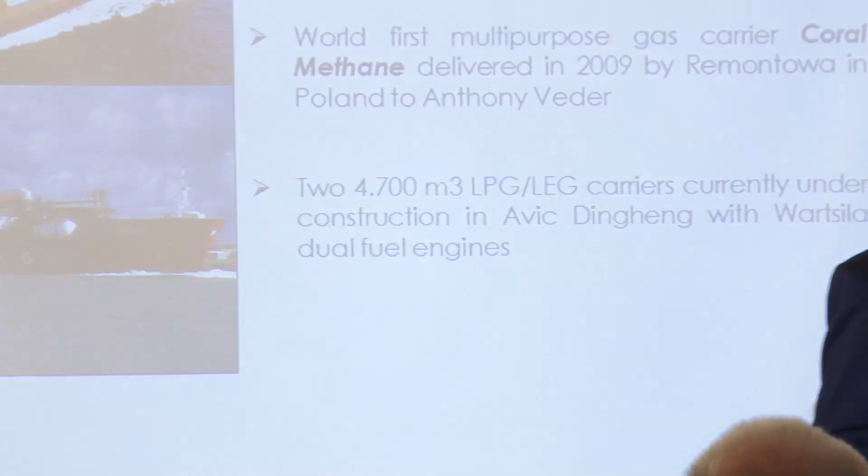But here in Europe, you have examples of vessels which are able to do bunkering operations. This vessel is just an example. This is a multi-purpose gas carrier, but it has already done LNG transfers to bigger and smaller vessels here in the Baltic. So if one day they finish the charter agreement with Skangas or another company, and decide to go to the port of Rotterdam because the owner is Dutch, and make bunkering, they can do it with this vessel.

But now we know that there are several projects here in Europe for building new bunkering ships in the range of 5,000–6,000 cubic meters. And this vessel is in this capacity also. Bunkering ships will be needed at some point when the storage capacity on board the gas-fuelled ship is more than, let's say, 200, 400 cubic meters. With 400 cubic meters, you need 10 trucks to fill the LNG, and it's not efficient at all. So you will need an LNG bunkering tanker.